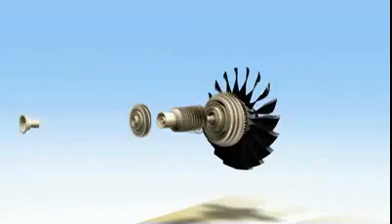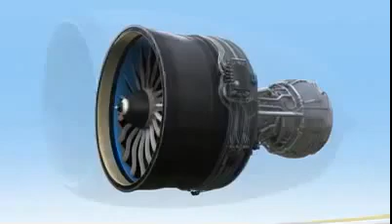The next generation of long-range aircraft are currently in development. To power them, GE is creating the most advanced commercial turbofan in our history, the GEnx. This engine will offer amazing advantages, but because these advantages are the result of proven technologies, it will offer all of the reliability you expect from GE. Let's take a quick look at some of this engine's most striking innovations.

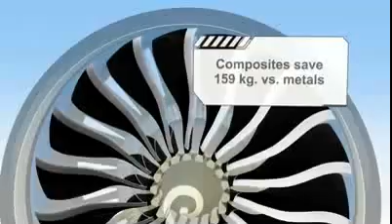One unique feature that sets the GEnx apart is its use of composites in the fan. These materials are light, durable, and incredibly strong, and have been proven in service on GE90 fan blades. We will now extend our success with these materials to the fan case, making it lighter and more durable.

Aft of the fan is the low-pressure compressor. As with many components in the GEnx, it incorporates the latest 3D aerodynamic improvements, as well as a debris-rejecting system to keep foreign material from entering the compressor.

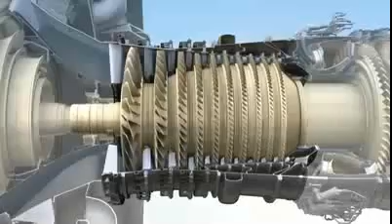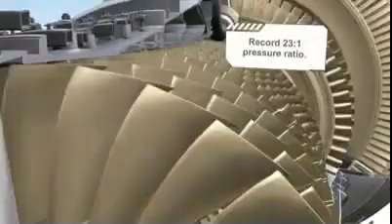The heart of every turbofan is its core, and at the heart of the GEnx is the most efficient, compact core we've ever produced. It features a 10-stage high-pressure compressor that uses 4 fewer stages than the engine it will replace. Fewer stages mean fewer parts and less cost. This efficient compressor will deliver an astounding 23-to-1 pressure ratio while providing the same stall-free operation GE is known for.

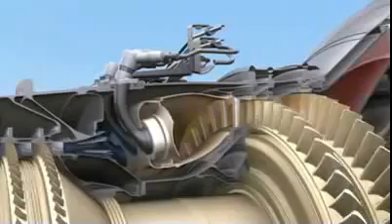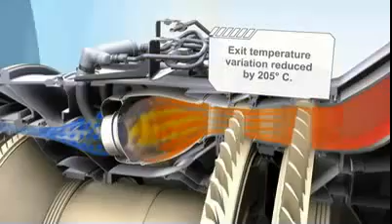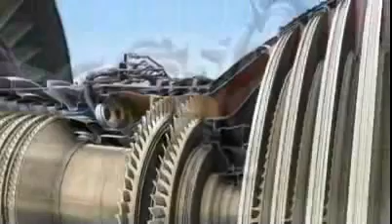If most combustors operated at the record pressures inside the GEnx, the flame temperatures would be unacceptably high and wouldn't keep NOx production in check. Not so with the GEnx, where we feature an advanced TAPS combustor in development since the year 2000. This combustor keeps temperatures low by utilizing lean burn combustion and a more uniform gas stream temperature profile, reducing the severity impact downstream. Turbines extract energy from the core flow.

Here, by utilizing our advanced design codes, fewer blades can now do more work. In addition, a counter-rotating architecture enables an even more efficient extraction, allowing for a 10% part reduction in select stages. All of these technologies have come together in one engine, providing maximum value and operating efficiencies previously unheard of.

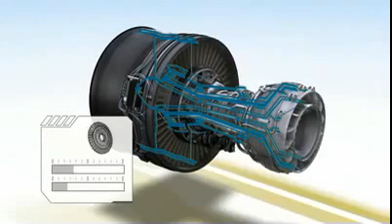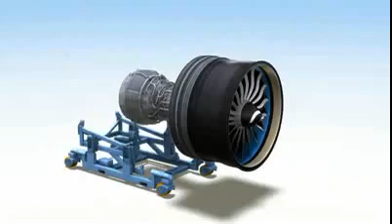Even when it's in the air, the GEnx is under the microscope. By using integrated diagnostic technology, the engine can monitor its own condition, diagnose faults, track performance history, and even monitor part life limits. When this engine has to come off wing, it employs an innovative modular maintenance concept designed to deliver significant savings in time and cost.

The engine easily splits into 2 modules, the fan and the propulsor. When the time comes for maintenance, the propulsor can simply be removed and replaced with a spare one.

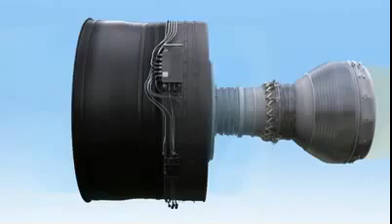The GEnx is a giant leap forward. It takes advanced, proven technologies and combines all of them into one efficient, reliable turbofan. It is the first great engine of the 21st century. It is imagination at work.

Rising energy costs in a world of ever-changing regulations are putting our customers under enormous pressure. To help, we put the GEnx under a lot of pressure too. Its compressor provides the highest compression ratio in aviation, helping make the GEnx burn lean and clean.

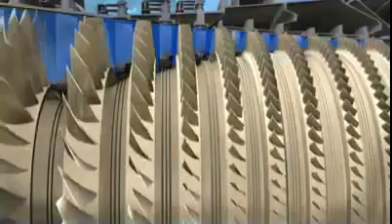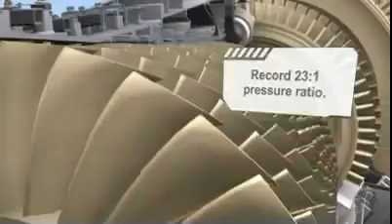GE has long set the standard for reliable, stall-free compressor operation. The GEnx extends on that legacy with a tremendously efficient compressor. With only 10 stages, it will achieve the highest pressure ratio ever.

One of the ways we achieve such remarkable efficiency is through the use of advanced 3D aero technology in the design of the blades and vanes, maximizing airflow through the core and optimizing tip clearances. 3D aero technology is also applied to the bladed discs, or blisks, that comprise 3 of the 10 stages in the compressor. As a single component, a blisk has far fewer parts and weighs less than a conventional assembly. There's no dovetail wear to worry about, and blisks are highly damage resistant.

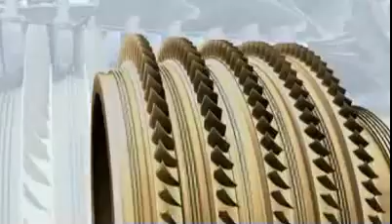In the aft stages are unique powdered metal discs that are specially designed for a high temperature environment. These discs and new ceramic bushings will help reduce part wear and extend hardware life, giving GEnx customers an unprecedented level of reliability. Improved materials and design will help create the latest in a long line of outstanding GE compressors. Just imagine how we've improved the other parts of the GEnx engine.

Our customers asked us to help them lead the charge toward a cleaner, greener future. To meet that goal, we did a complete engine overhaul and created the most advanced combustor in the industry. With our innovative single-annular TAPS combustor, the GEnx is designed to be the cleanest burning engine in its class.

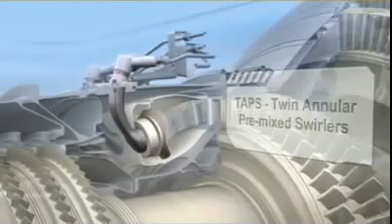This combustor will far and away comply with all existing and expected regulations for NOx emissions, positioning GEnx operators for clean compliance for many years to come.

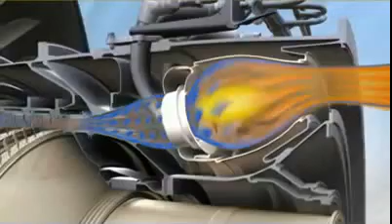Cleaner combustion requires technology that delivers high efficiency and lower, more uniform flame temperatures. This is achieved with our innovative pre-mixing concept. By directing nearly all of the airflow through unique swirlers and around nested fuel nozzles, we create the ideal pre-mixed fuel-air environment. Because NOx production is strongly driven by combustion temperature, these emissions will be drastically reduced.

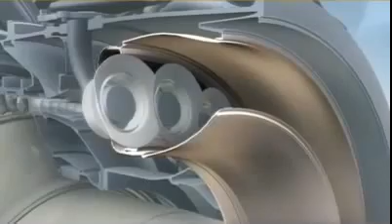Additionally, because all of the combustion air enters through the dome and mixers, no dilution holes are required on the new liner. This in turn reduces distress, leading to longer liner life and reduced maintenance costs.

The lower and more uniform temperatures produced by this combustor have another benefit as well. They significantly improve the lives of all downstream components. This clean, easy-to-maintain combustor is one of the many innovations that will give GEnx customers advantages unavailable to anyone else.

Just imagine how we've improved the other parts of this amazing new engine.

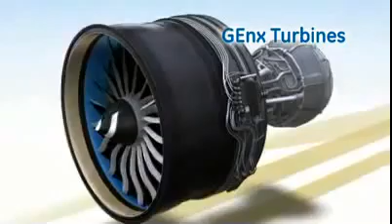The turbines are the most aft components of the GEnx, but they are hardly an afterthought, as they use materials, coatings, and architectures that are truly revolutionary.

The job of the high and low pressure turbines is to extract work from core flow. This efficiency has never been better, thanks to recent improvements in design codes and turbine blade architecture. Fewer blades can now do the job more efficiently, while simultaneously reducing cost and weight.

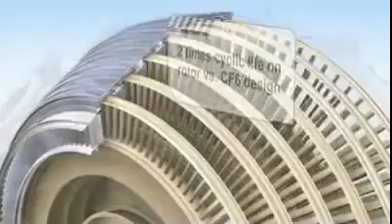The bulk of engine maintenance costs are driven by the life of the turbine components. By including the use of new, more temperature-capable materials and reducing the severity of the operating environment, we've limited the maximum temperatures these components will experience.

The design will feature unique powdered metal rotors, specialized coatings, enhanced cooling techniques, and new blade materials, delivering a turbine with the right balance of performance and extended life.

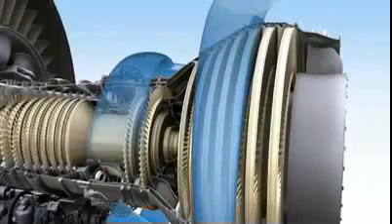When it comes to the low-pressure turbine, we decided to put a new twist on things by incorporating a counter-rotating design. This technique, rigorously tested in other engine programs, provides numerous benefits, including fewer parts, less weight, and improved efficiency, with no additional architectural complexity.

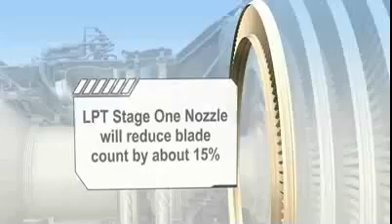Also, this turbine is specifically designed and shaped for maximum performance, and in addition, achieves great performance retention. The turbines in the back of the GEnx use an impressive variety of innovations to lower life cycle costs.

Just imagine how we've improved the other parts of this amazing new engine.

Many of the innovations on the GEnx are hidden deep inside. Not so with the fan assembly. Here you can see two of the engine's most important and most distinctive features: its composite fan blades and case.

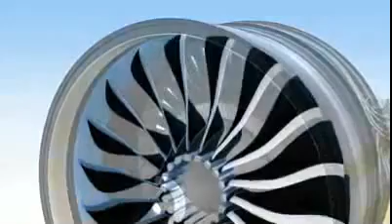The blades are the third generation to be made of carbon fiber composite material combined with a titanium edge. They are so durable that only 3 have been removed from service in the first 6 million flight hours. In addition, they are very light in weight and are more fatigue resistant than titanium at less than half the density.

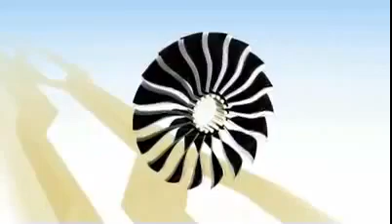Because these composites are extremely strong and can be intricately formed, each blade can be made larger and more aerodynamic. And since they move more air, only half the blades are needed.

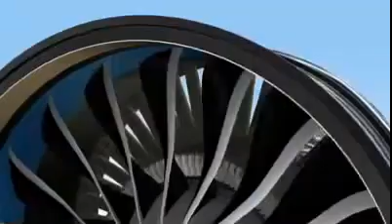Additional weight savings and strength are found in the fan case, which is made with a braided carbon fiber material. This composite provides 30% better containment characteristics and eliminates corrosion concerns inherent in metal designs. It also provides better clearance matching, thanks to the better thermal stability of composites.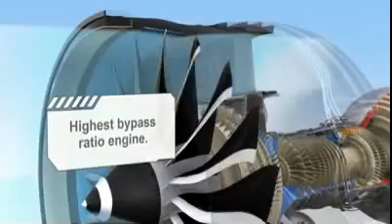Composites enable a larger fan. A larger fan is necessary for a high bypass ratio, which is a key component to reduce the engine's fuel consumption. The high bypass ratio also reduces noise.

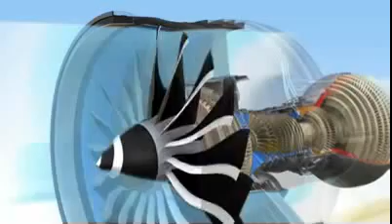The GEnx will be 13 decibels quieter than its predecessor, a significant amount that will enhance the cabin environment and reduce noise around airports. Designed to be the quietest commercial engine we've ever produced, it will be well within global regulatory requirements far into the future.

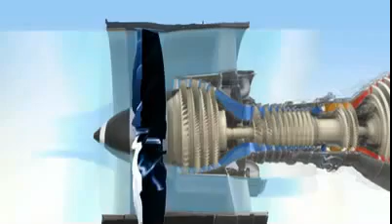Air isn't the only thing that can enter the fan. Foreign objects can too. That's why the GEnx engine's spinner, wide chord blades, and LP compressor are designed to centrifuge debris away from the core. In addition, bleed doors act as scoops to direct any remaining debris out.

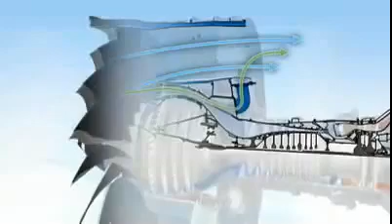As a result, the core gets a clean, uninterrupted flow of air. Finally, the outlet guide vanes bring a lightweight honeycomb-filled structure that is so strong, the total number is 40% fewer than the engine it replaces. While they may not move, they are nonetheless revolutionary.

Any new engine is going to require thought up front, and that's precisely where we directed a lot of attention up front at the fan module. As a result, we found ways to improve efficiency, performance, and cost using a variety of proven advanced technologies. Imagine what we were able to do with other parts of this amazing new engine.

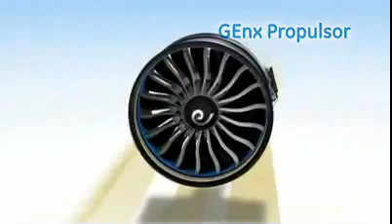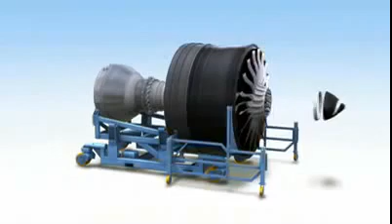The GEnx engine is designed from front to back to improve airline efficiency. That's why its front and back are modular units that can be separated when the time comes for maintenance. The fan module is built with durable composites that make it virtually maintenance-free. So when the propulsor module of the GEnx needs maintenance, simply remove it and leave the fan unit with the airframe. Attach a spare propulsor to it and you're ready to fly.

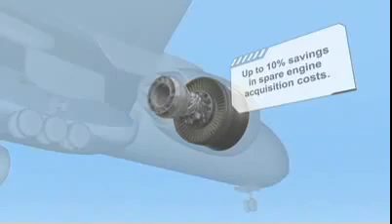This innovative solution can reduce your spare engine acquisition cost by 10%, giving you the flexibility to buy propulsors instead of complete engines. Smaller and much lighter, propulsors give you greater flexibility when storing, handling, and shipping them. Your transportation costs will be much lower, and your logistics will be greatly simplified. The unit is compact and light enough to be shipped by most conventional means of air and ground transport.

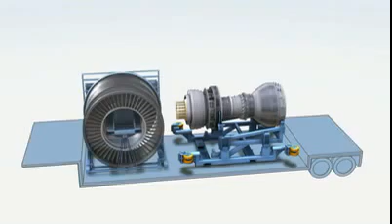Unique to GE, the propulsor concept was first proven with the GE90 and is now available with the GEnx. It's an example of how we're willing to think outside the box to help customers succeed, or even outside the fan. Just imagine what we're able to do with other parts of this amazing new engine.

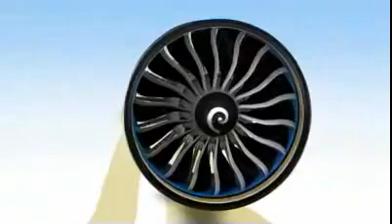The GEnx is not just a piece of hardware. It is truly an intelligent engine that is capable of monitoring its own condition, analyzing potential faults, tracking performance history, and even monitoring part life limits. It is able to do all of this thanks to GE's combination of intelligent technology and years of diagnostic experience.

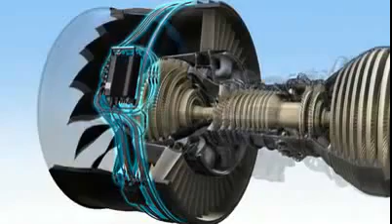Sensors are located on subsystems throughout the engine. These sensors feed data into a diagnostic computer that contains a database of operational history, as well as a model of optimal engine performance. This GE database was generated using thousands of engines over decades of flight.

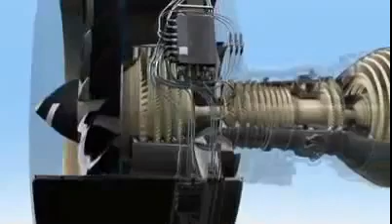During operation, the sensors send data, which is compared in real time to historical performance, as well as to the model. It automatically looks for variations in operating parameters, tracks engine performance, and helps troubleshoot faults that occur. Thanks to this automated process, the GEnx engine improves fault isolation up to 75% over its predecessor. This can mean big savings in maintenance costs.

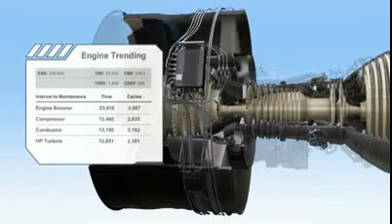But more than just tracking performance, the GEnx will provide an automated and engine-specific maintenance history. Tracked by serial number, your engines will know what's been done to them and what needs to be done to them. Now, maintenance will know the complete engine history, what is needed for a particular job, and when that job needs to be done. In addition to overall operational history, the GEnx can track the history of individual parts.

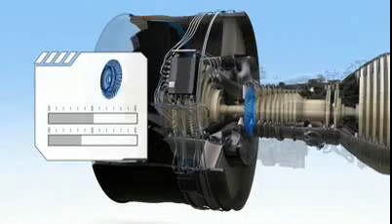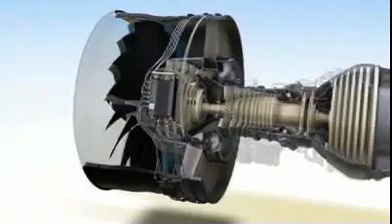By serial number, life-limited parts in particular can be tracked by the actual severity of their use. The system tells you when to replace them. With this technology, your maintenance staff will be synchronized with every GEnx engine in your fleet. Flight crews will know in advance when they have a developing situation, and you'll know that the cost savings and operational efficiencies make the intelligent engine a very smart choice indeed.